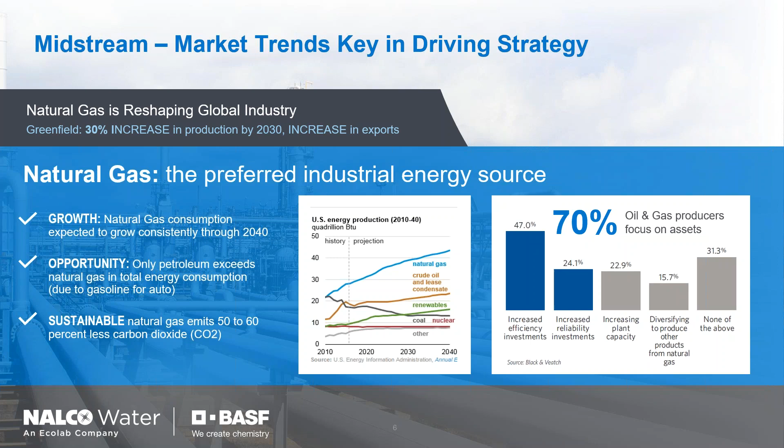In order to meet this increasing demand for natural gas, plants really need to be operating at peak efficiency. In a recent published study, producers identify that they're already increasing investments in efficiency and reliability. Those are key drivers in plant availability and operating efficiency.

The amine unit is considered the heart of a gas plant. If this unit is having problems, the entire plant is affected, and it really compromises overall plant efficiency and operating goals. Problems can and do happen in the amine unit. Jesse is now going to walk us through 3 ways to improve your amine unit. Jesse. Yeah, thank you, Andrea.

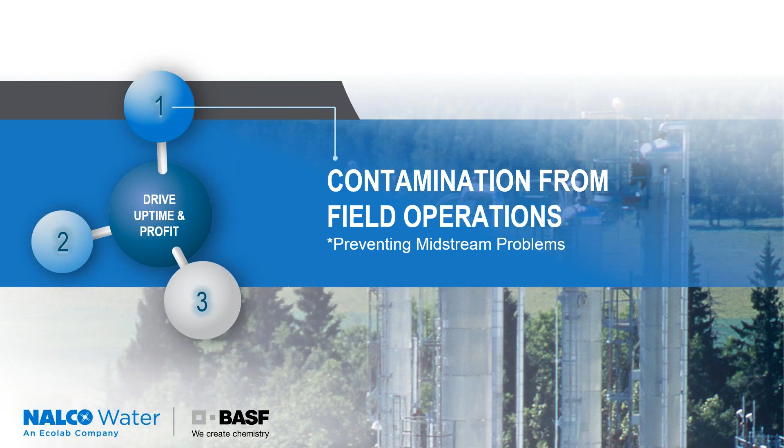Over the next half hour, I'd like to touch on 3 specific things you as a designer, operator, or support engineer can either review or change to maximize the amine unit operations in your gas plant facility. Let's begin with the #1 thing you can do: keep contaminants out. This entails first identifying the contaminants that can impact performance and reduce or mitigate their entry in the gas plant, and more specifically, the gas treating unit.

To begin the discussion on contaminants, I believe we should first review the anatomy or makeup of the oil and gas gathering system. This should help us identify possible contamination and their entry points. This system is a network of pipes, meters, and processing equipment laid out across the drilling basin. Pipes are the small 6 to 12-inch flow lines of oil, gas, and water. Meters are for the measurement of well performance and the allocation of flows back to the landowner.

And finally, field processing equipment made up of tank batteries, which separate the oil and gas produced and the water. They also store it. Compressor stations also exist for moving along the recovered wet gas and NGLs to the gas plant. And there are also field dehydration units that dry the gas to protect the miles of gas pipeline from corrosion induced by moisture in the system.

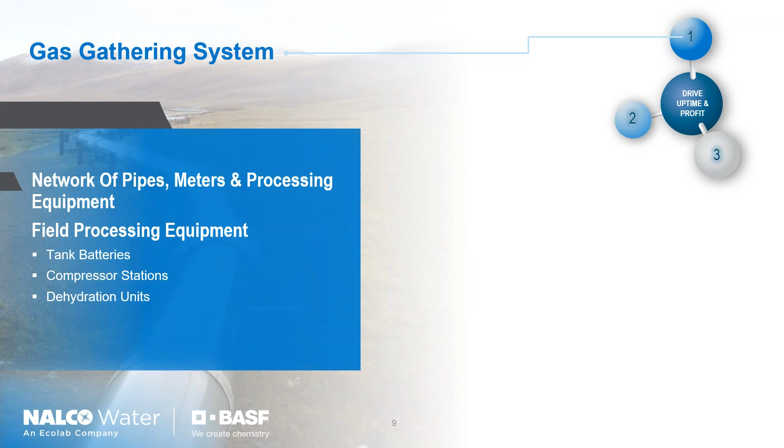Here's a better way to illustrate what I just described. I pulled this drawing from a Google Map search of an area just outside of Odessa, Texas. You can see the well pads or squares in the larger plot of the gas plant, and the gathering system is all that exists in that circle, that larger circle.

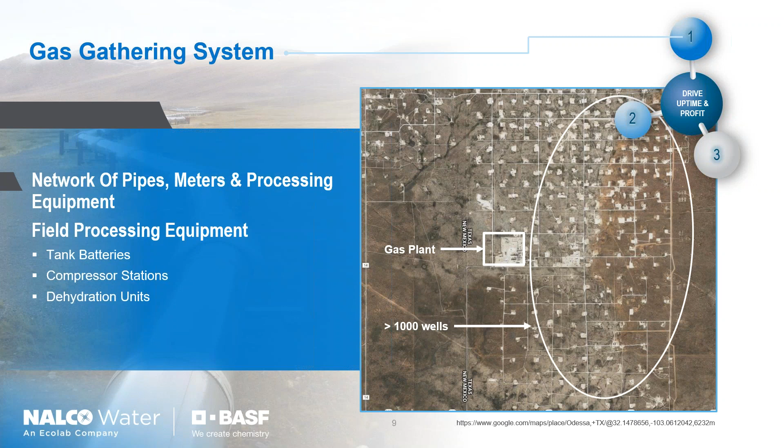It is what we just talked about, probably more than 1,000 unconventional horizontal wells, flowing to more than 100 tank batteries or so, which each contain vapor recovery units or small compressors connected to a larger compressor station and dehydration units, all flowing to the gas plant for more processing.

So let's get back to the contaminants. I'll classify these contaminants as gases, in our case, trace gases, aerosols and liquids, and finally, solids that are going to cause performance issues if and when they enter the gas plant. The trace gases I'll speak of today is primarily oxygen introduced by pulling air into the vapor recovery units.

Another category is aerosols and liquids. These are compressor lube oils that make it past the coalescing filters on the compressor skids, and methanol and glycol that is injected in the pipeline in the wintertime to prevent hydrate formation. And finally, solids that I'll group in the category of black powder, iron sulfide, and iron oxide. Now that we've identified them, let's explore how they enter the gathering system so we can best manage them.

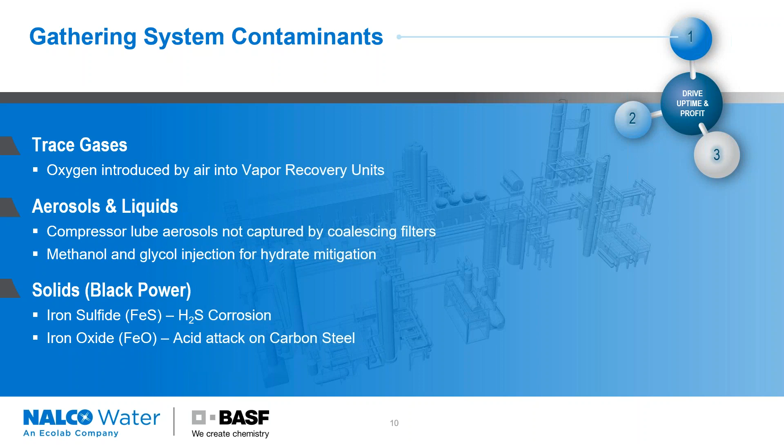We'll begin with trace gases. Most gathering contracts limit oxygen to less than 10 parts per million. I've seen some as high as 2,000 parts per million, but with stipulations to maintain the oxygen levels to 0. One way oxygen can enter the system is from the vapor recovery units pulling air into the system. Let's go more into this entry point.

Leaking or unsealed thief hatches on oil and water tanks that feed the vapor recovery units can pull air into the gathering system. Other than checking thief hatch closures and gasket sealings, one option is to recover vapors from the oil prior to it entering the tanks and combusting only those vapors which could contain air. We can prevent oxygen from being a contaminant by separating recoverable gases from those that may contain air or vapor using a vapor recovery tower.

So oil and gas and produced liquid exits from the well and after water is separated, it is fed to the vapor recovery tower. From there, oil flows to the storage tanks and recoverable gas is pulled into the gathering system from the gas plant through the vapor recovery unit. Any air that inadvertently enters the storage tank through thief hatches is kept separate from the vapor recovery gas and is combusted along with the other storage tank vapors. Sounds like a solution, right?

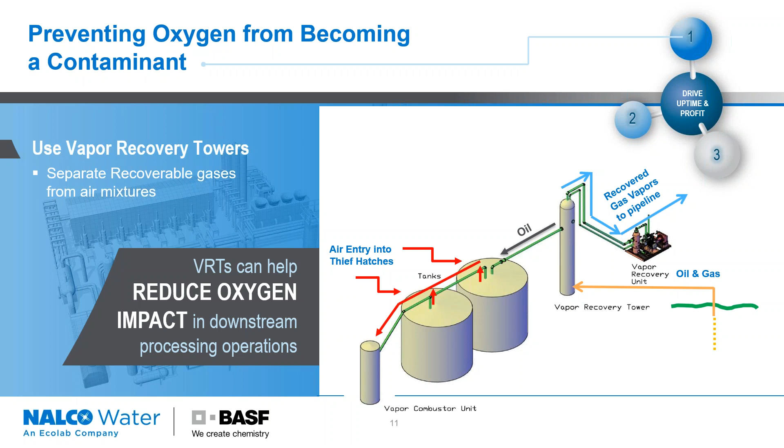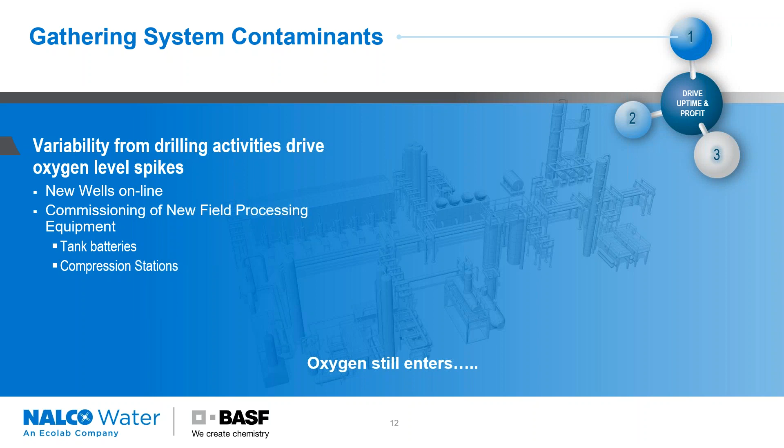Well, not exactly. Variability in drilling activities will drive oxygen level spikes. This is attributed to new wells coming online and commissioning of field processing equipment like new tank batteries and new compressor stations. So we can minimize oxygen in the gathering system, but probably never eliminate it. Oxygen still enters the system.

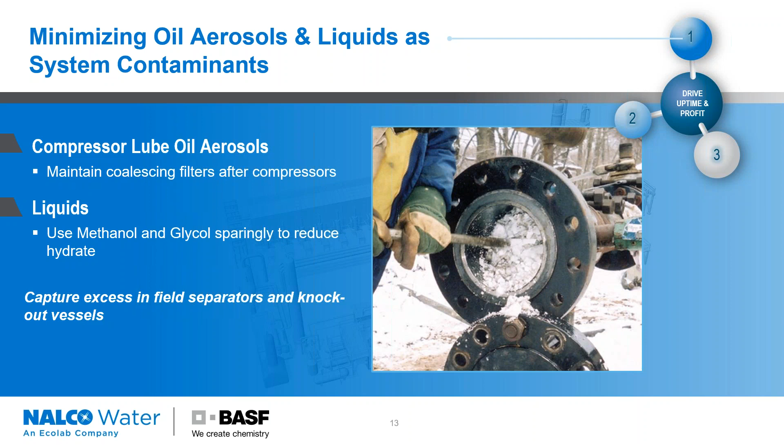Now let's talk about the next contaminant, oil, aerosols, and liquids. We can minimize lube oil by maintaining coalescing filters that exist in the compressor skids. And for the injection of methanol and glycol, we just need to use them sparingly and ensure that we have adequate field knockout vessels to capture the excesses.

Our final contaminant are solids like iron sulfide and iron oxides. We'll discuss how this is formed and how to minimize the formation. Let's start with iron sulfide. It can be identified as a sticky, gelatinous substance, or even a very fine black powder. If there is hydrogen sulfide in the sour gas, iron sulfide will form from corrosion of the steel pipe. However, if the gas does not contain it, iron sulfide still may form in the presence of sulfate-reducing bacteria.

Additionally, iron oxide can also form from an acid-producing bacteria. These bacterial organisms thrive in areas where flow becomes stagnant, like well test separators, which are only used a few days a month to test the wells on the pad. Is bacteria creating your black powder in your upstream gathering system? If so, you can characterize them and apply the appropriate biocides to minimize the resulting black powder.

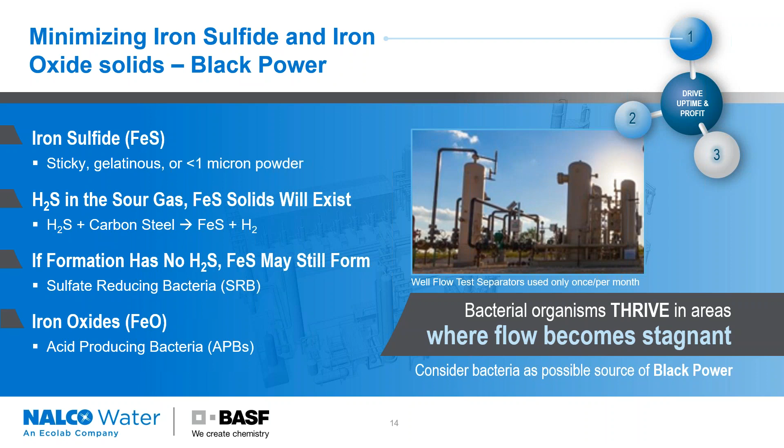So far, I've talked about minimizing the entry of trace gases, liquids, and solids. Now, let's talk about how to prevent those liquids, aerosols, and solids from getting into the gas plant and the amine unit. The best prevention is a 3-vessel inlet gas filter.

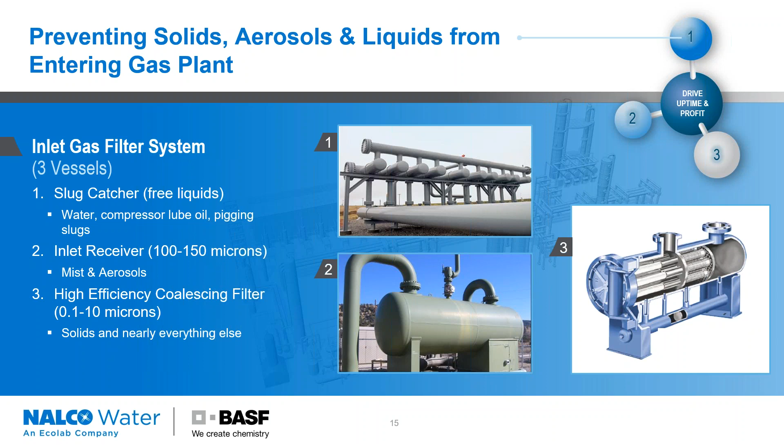First, a slug catcher to catch the free liquids, water, compressor lube oils, and any pigging slugs. Second, an inlet receiver that is capable of removing mist and aerosols down to 100 to 150 microns. And finally, a high-efficiency coalescing filter that will remove pretty much everything else. Do you have all 3 in your gas plant or just one?

The first step in maximizing your amine plant performance is keeping contaminants out. We do this by identifying the contaminants, minimizing their entry with equipment like VRTs, vapor recovery towers in the field, and inlet gas filtration at the gas plant fence line. Finally, minimizing the formation with a chemical program using biocides.

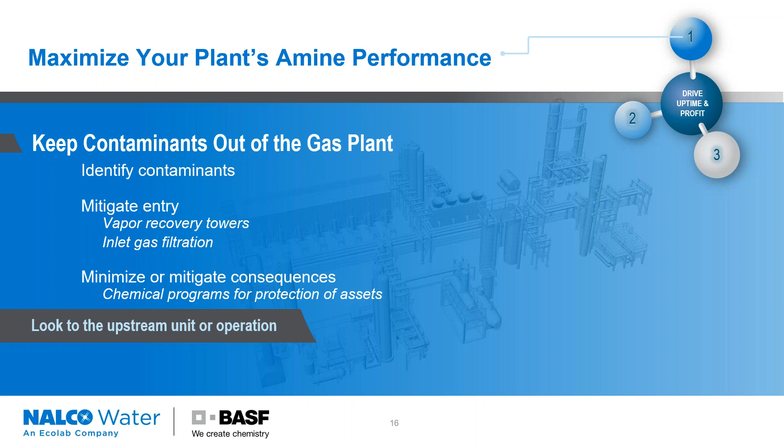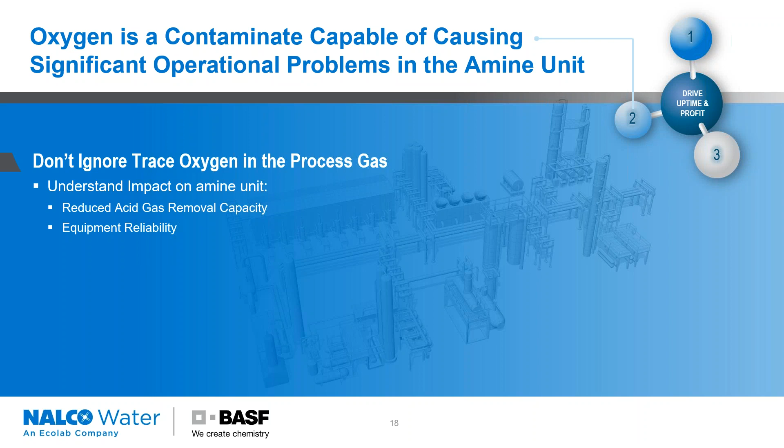The second way to maximize your amine unit performance is to understand the role oxygen plays in amine unit corrosion and knowing what to do about it. Oxygen is capable of causing significant capacity, equipment and reliability problems if its presence is ignored. Let's go over the impact of oxygen on the amine solvent capacity and the equipment reliability.

Oxygen, even at trace levels, degrades the amine solvent and forms heat-stable amine salts. These salts form bound amine, so it is unable to absorb new acid gases and results in a capacity loss of the solvent and the entire plant. These degradation products exist as amine formates, acetates, oxalates, bicine, which is an amino acid, and a family of other amine compounds. These amine salts also increase the corrosivity of the solution.

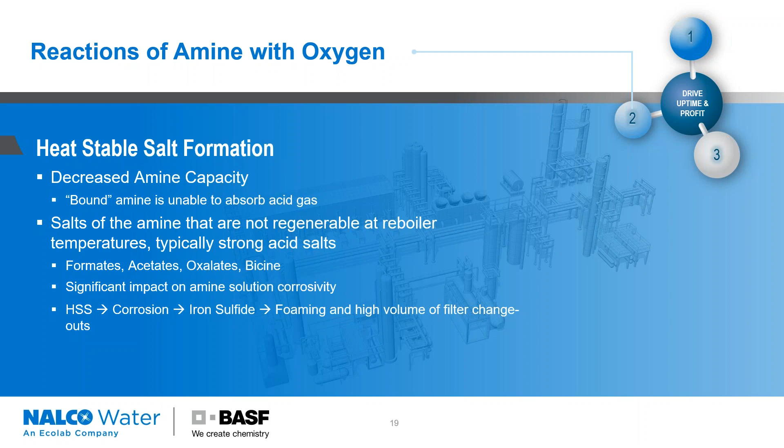Finally, heat-stable amine salts drive corrosion, which produces iron sulfide in the amine solvent. These iron sulfide particulates often increase foaming tendency of the circulating solution, and at a minimum increase operating costs by driving up the frequency of mechanical filter changeouts. The newly formed heat-stable salts, bicine and other amine compounds, make the amine solvent more corrosive than what the unit was originally designed for.

For example, bicine, the degradation product of methyldiethanolamine, is an amino acid. It has also been determined to be an iron chelant. This means if there's any hydrogen sulfide in the gas that has created some iron sulfide layer on the carbon steel vessels and piping, that iron can be chelated by the bicine, and the resulting bisulfide will form more iron sulfide, which is continuing the corrosion path.

Amine units carry a designed-in general corrosion allowance of 1/8 inch, or 125 thousandths of an inch, over a typical 25-year plant life. However, bicine can accelerate that corrosion in localized areas of the plant to much greater than 5 mils per year. This often leads to pipe wall thinning and leaks in the hot lean areas of the amine unit. Oxygen accelerates the corrosion in the amine unit past the designed-in corrosion allowance.

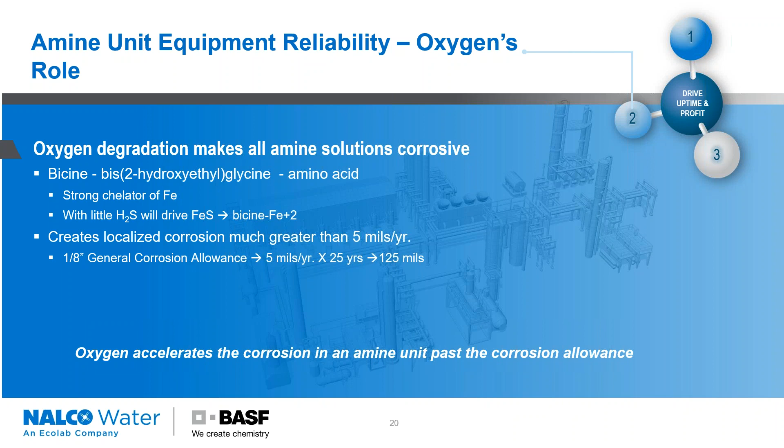The combination of solvent degradation and increased corrosivity leads to amine losses, localized corrosion, higher operating costs than budgeted, and lost operating revenue from unplanned downtime. So really bad things happen when oxygen is present in the amine unit process gas.

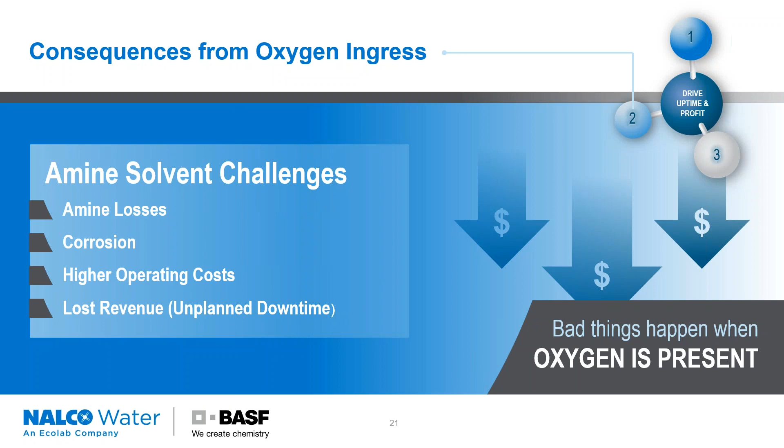What can we do about trace levels of oxygen in the amine unit? We can monitor and control. We should monitor the feed gas with an online analyzer, as well as monitor the amine solution for heat stable anion salts and metals, which indicate corrosion activity. We should also monitor corrosion with corrosion coupons. And finally, we can control the solution corrosivity by using a corrosion control program.

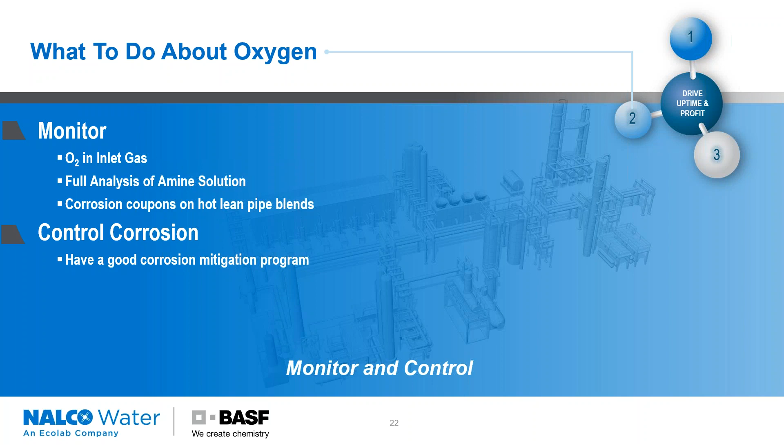So far, we have discussed keeping contaminants out of the gas plant and not ignoring the impact of trace oxygen in the process gas. The last way you can maximize your amine plant performance is to select the best amine for both your current and future needs. Of the most widely used amines in the midstream gas processing industry, diethanolamine, aminodiethylene glycol, methyldiethanolamine, and formulated MDEA blends are listed here with 4 common requirements.

Acid gas removal capability or capacity. Is it efficient from an equipment standpoint? Stability or degradation with acid gas. Is it stable, or does it degrade with the common acid gases that I need it to remove? Selectivity and mercaptan removal. Will it remove the acid gases such as hydrogen sulfide, carbon dioxide, or mercaptans the way that I want it to? Of these 4 categories, MDEA and formulated MDEA blends offer more capacity and solvent stability than the primary or secondary amines such as aminodiethylene glycol and diethanolamine.

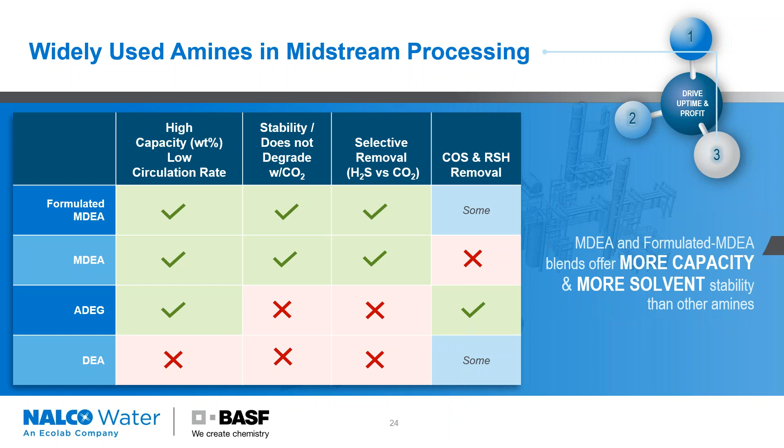For the high gallon per minute per 1,000 wet shale gas cases, the midstream industry treating requirements rely on deep CO2 removal solvents for NGL, natural gas liquids, and LPG production. Also, when ethane values drive ethane recovery, product treating becomes a gas plant requirement. In these cases, only formulated MDEA and ADEG satisfy this amine unit's operational requirement. So are you using the most efficient, stable, and flexible solvent in your amine unit?

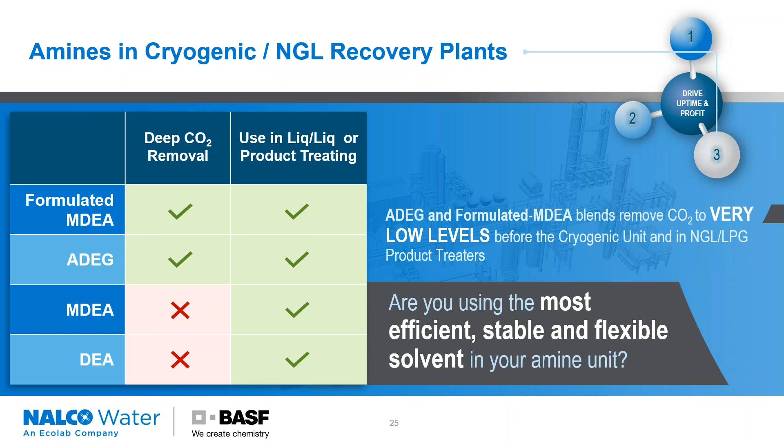In summary, these 3 ways to maximize your amine unit performance are: 1, keep the contaminants out of the gas plant. You can do this by identifying them, minimizing their formation, and minimizing their entry. 2, don't ignore trace oxygen in the gas process. Have an active amine program to monitor the feed gas and solvent regularly. Install a corrosion control program to be ahead of failure due to accelerated corrosion.

And finally, 3, select the best amine solvent for your current and future needs. Of the most widely available solvents and the removal requirements in the midstream industry, formulated MDEA, MDEA, and ADEG should satisfy almost all gas plant needs.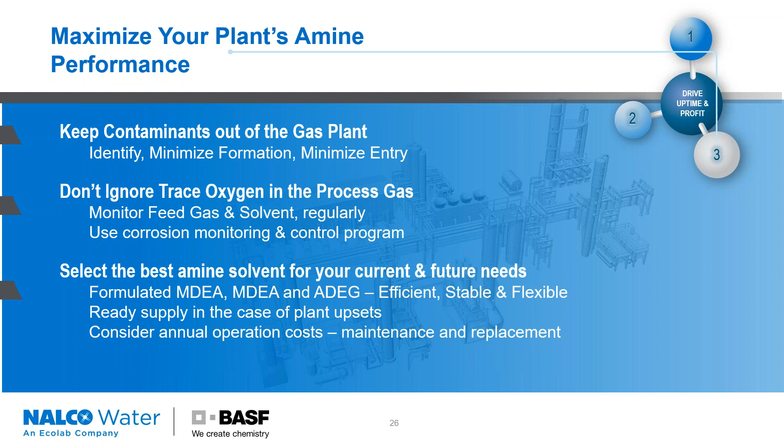This is coming from Todd. He wants to know if there is anything that could be added to the amine to correct increasing acidic levels, and is the only solution replacement?

Yeah, this is Jesse. So, Todd, I think you're suggesting adding some stronger base to basically accept the anions. And bases are added, or other additives are added to reduce the corrosivity of the anions that are present. You can do that, but at some point you're going to have to totally remove those and take them out of the system. The other option is to start removing those with online systems, or start to remove parts of the amine.

Initially, what I was talking about, most of these anions are produced from contaminants in the gas stream. So it's really important to minimize the contaminants that are coming in, and if it's oxygen, use a corrosion control program.